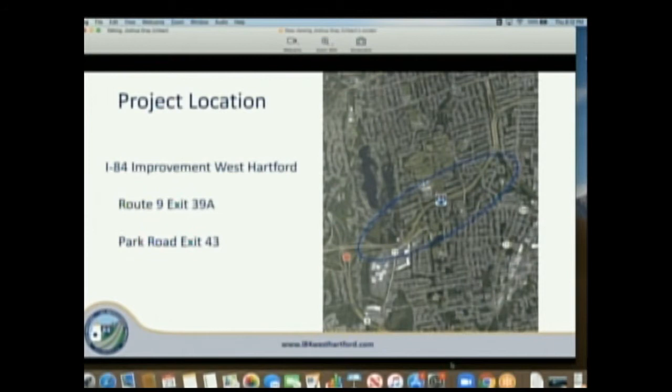So just a note on the location of the project. On this map, I've circled the approximate limits of the project. On the left side of this map there is the interchange with Route 9. This is the western limits of the project, at the Route 9 exit and on-ramp. Then the eastern terminus of the project is where Park Road has an on-ramp to I-84 Westbound. So that's the approximate limits of the project. It is 2 miles of Interstate 84 between exit 39A on the west and exit 43 on the east.

Down in the bottom here, you can see this is West Farms Mall. Across the street is Corbin's Corner, so everybody kind of knows this area well by referencing the mall. Also over here is Wolcott Park for the town of West Hartford, and Ridgewood Road with the interchange and the highways right here. Sort of in the middle of our project is also South Main Street. So that's just giving everybody an idea of the limits of the project.

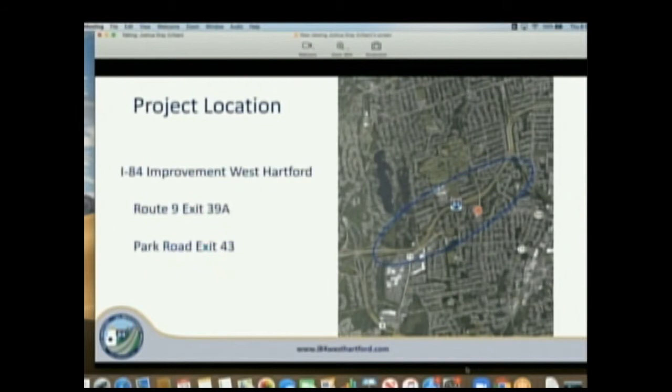Now I want to talk a little bit about the scope of the project and what work is going to be performed. The main purpose of this project is to improve traffic operations and safety throughout the I-84 corridor.

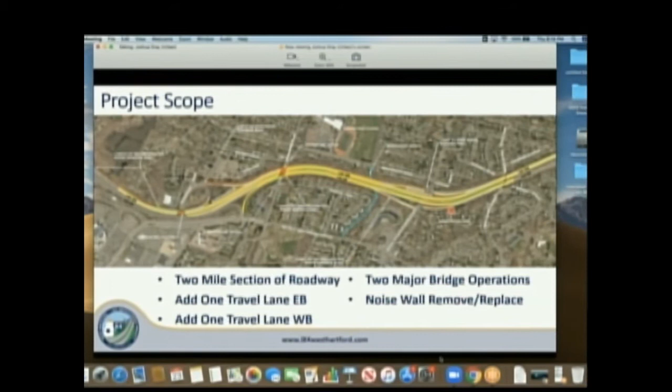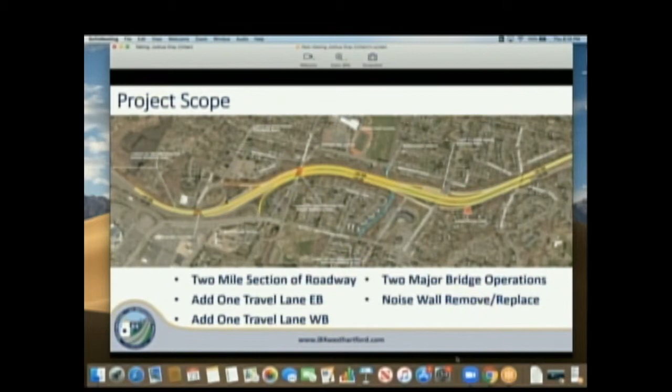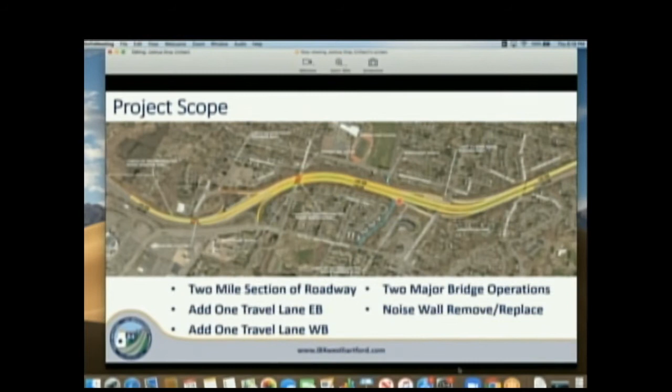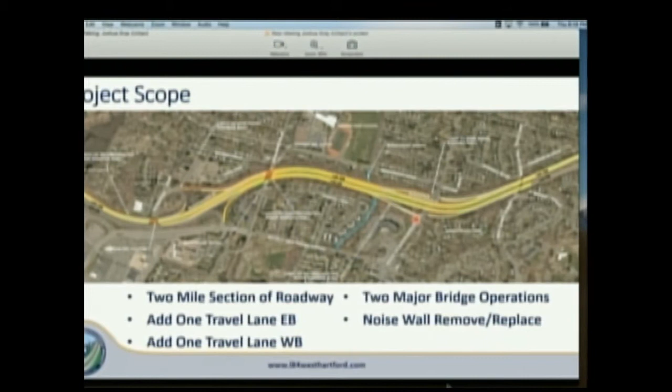We are adding an additional travel lane in the eastbound direction from the Park Road on-ramp all the way to the Route 9 interchange. We are also adding a travel lane in the westbound direction between the on-ramp off of New Britain Avenue and the exit at South Main Street. These additional lanes are what we call auxiliary lanes. They're for cars to be able to enter and exit the highway, so the lane would be an additional lane in between the on-ramps and exit ramps.

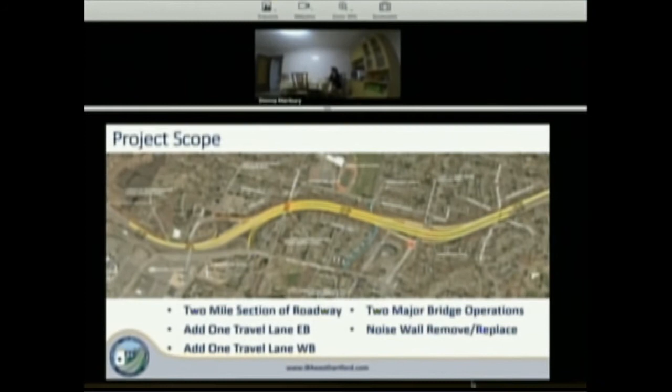One of the reasons why we have a lot of congestion on I-84 in this area is due to people entering and exiting the highway and having to shift over a lane when they enter, and people exiting often causes a conflict. So adding that additional lane will just ease some of the congestion from those merge and diverge moves.

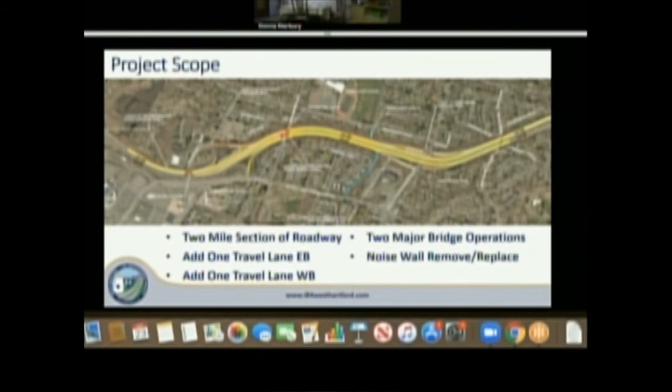There will be some major bridge operations for this project. One I want to highlight is here at Berkshire Road. There are 2 bridges there, one for the eastbound and one for the westbound direction. Those bridges will both be fully replaced during the project, and they will be done in stages, so there will always be 3 lanes of I-84 traveling in both directions. So we'll be building those bridges pieces at a time.

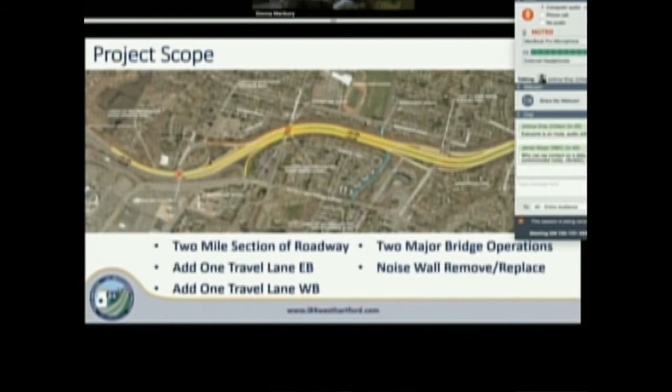The other major bridge is at Ridgewood Road, for I-84 Westbound, which travels over Ridgewood Road. That bridge is going to be replaced also. We are leaving the foundations for that bridge, but the entire bridge deck will be rebuilt new, and the bridge will be slightly widened to accommodate the additional lane on I-84 Westbound.

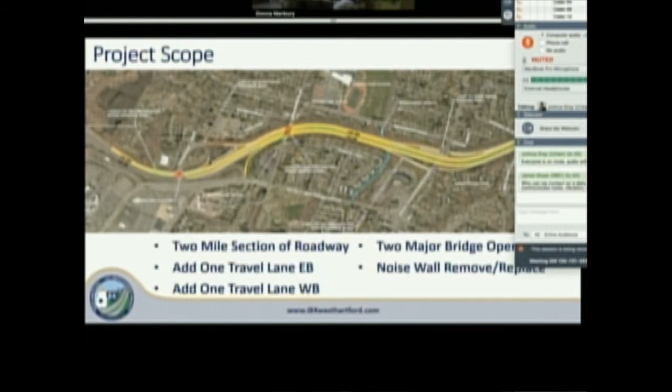There's also noise barrier walls in this project. There are noise barrier walls existing along the highway today. Many of them are fairly aged, so those will be removed as part of this project and replaced with brand new noise barrier walls.

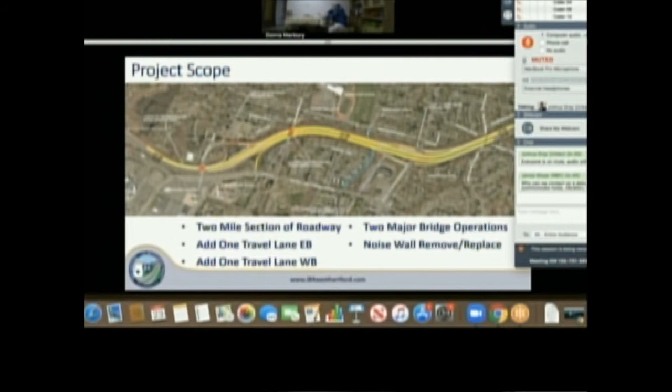Just some of the major operations for the project. I've already mentioned several. We will have a new pavement overlay in addition to the widened lane. We will overlay the entire project with new pavement.

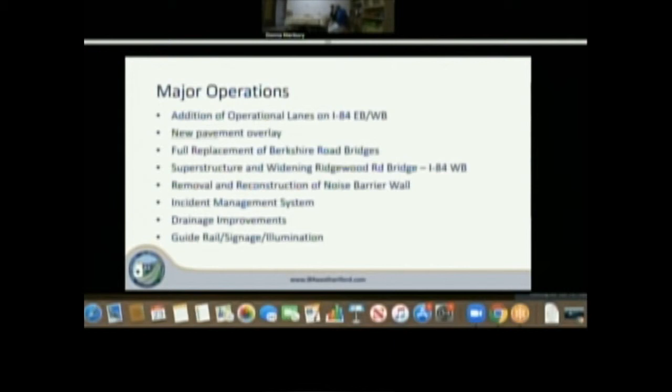There's some discussion about the replacement of the Berkshire Road bridges and the superstructure or bridge deck replacement for the Ridgewood Road Bridge. There's also work on the incident management system, which the Department of Transportation uses to communicate with the traveling public. You'll notice overhead signs with messaging on the highway - those signs are part of the incident management system to alert drivers of traffic ahead, accidents, or lane closures.

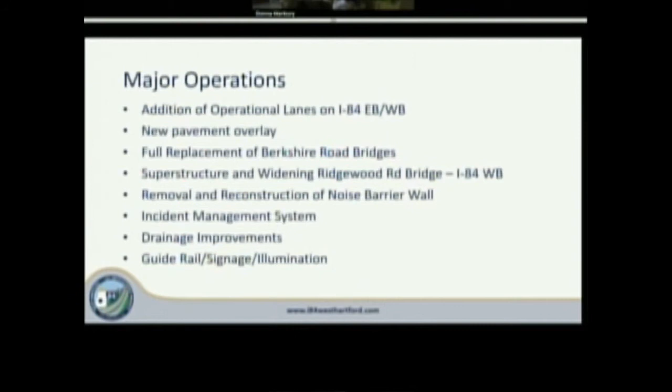So we will be replacing some of those structures. We will also be installing additional speed sensors and cameras within the project limits to help with that system. There's also drainage improvements involved with this project.

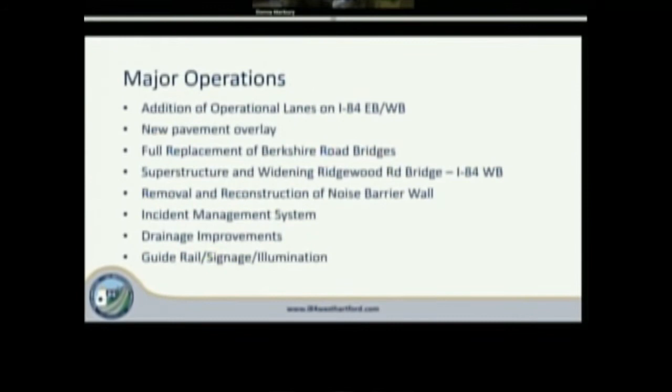Some drainage piping and structures are being replaced. There's some grass swales, and in general it's just upgrading the drainage in the area. There's a few additional drainage features to help out with some areas that had poor drainage in the past.

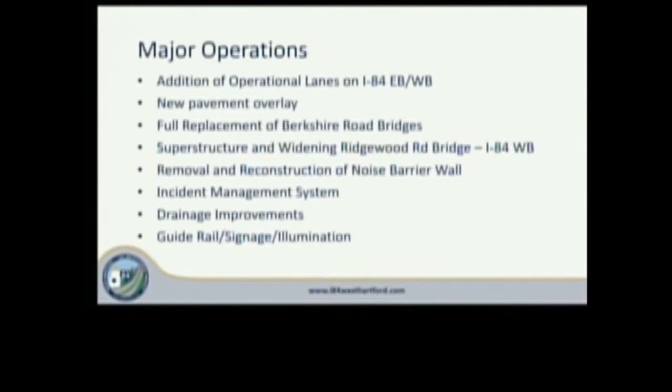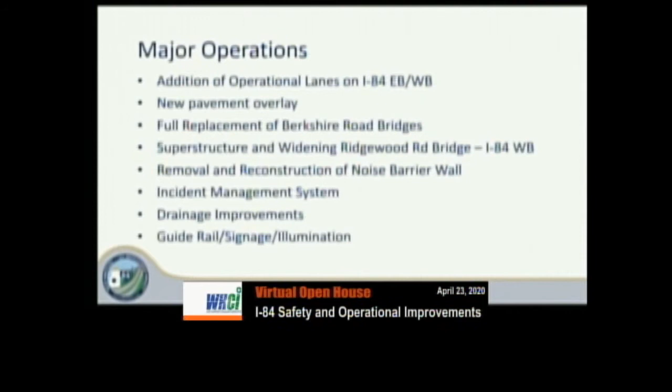And then there's multiple safety improvements, mostly to bring I-84 up to current standards. There's some additional guide rail along the sides of the highway and in the median. There's new signage and new illumination, lights along the highway ramps and things like that. This is all based on current DOT standards.

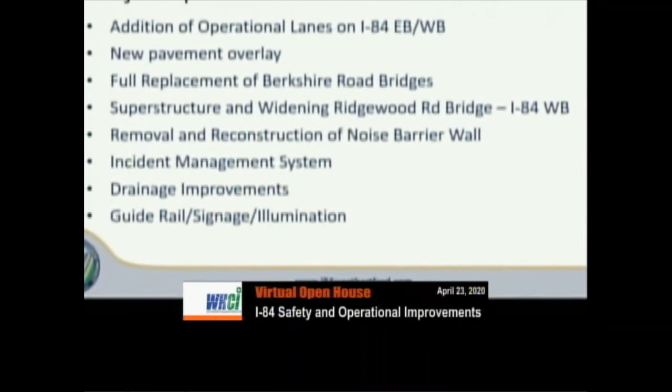There will also be some minor bridge repair work done on some of the bridges in this area. While we're out there, we will be repairing some of those bridges and bringing them into a state of good repair, and replacing some of the concrete parapets to conform to current design standards.

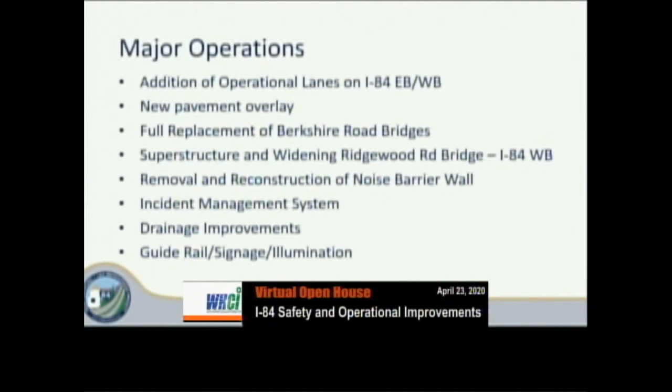Just a quick word on the stages of construction. As I mentioned before, there will be 3 through lanes in each direction of I-84 during the construction process any time there is heavy traffic. So on a daily basis, there will be 3 lanes open in each direction. There will be some nighttime closures that will reduce that number of lanes, but during heavy commute hours there will always be 3 lanes open.

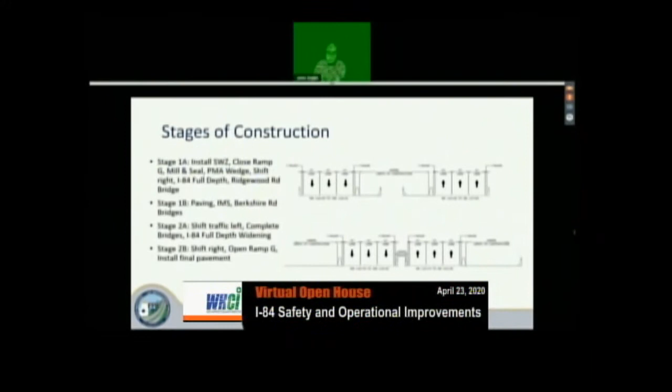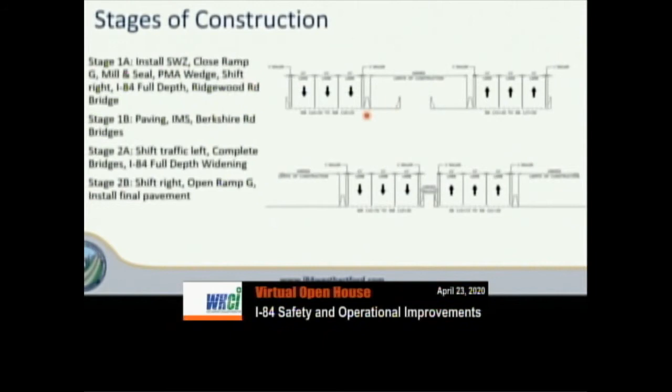We accomplish that by moving traffic inside or outside on the highway. You can see the top picture there with traffic all shifted to the outsides of the highway, and then the contractor will be allowed to work in this middle area. There are concrete barricades here that will separate the work area from the traveling public for safety. In other stages, we'll shift all the traffic to the inside or the median of the highway, and the contractor will be able to work in the outside areas. That's how we're able to replace these bridges while still maintaining 3 lanes at all times.

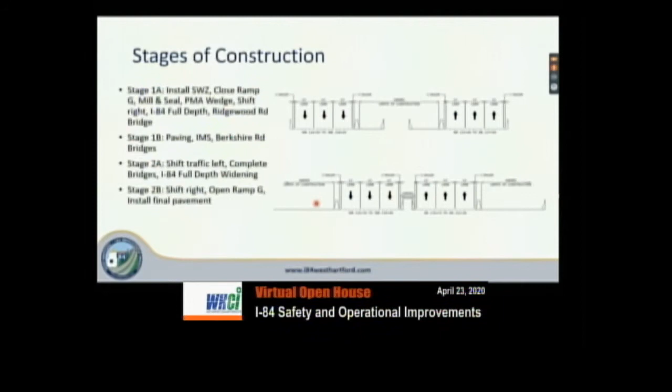During 2 of our stages, we will also have a ramp closure, and I'll talk about that more in a minute. And at the end of the project, there will be a final pavement installed so the whole project from end to end has a nice finished surface.

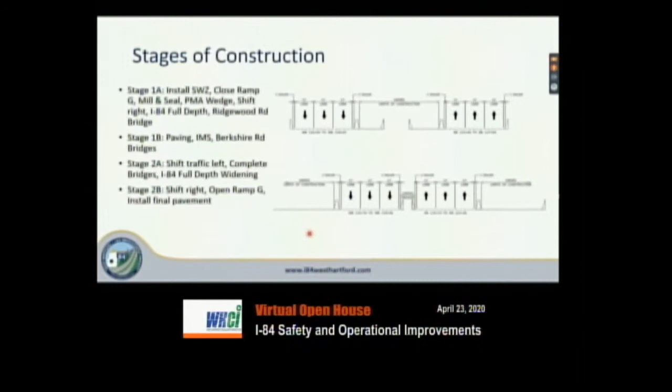The department did work with a lot of the businesses in the area, some of the residents, and the town of West Hartford about this closure. It was determined that the best time to perform that would not be for the entire year, but only during the summer construction seasons. So the closures will happen from May to October this year, and from April to October 2 years from now in 2022. That period allows us to reopen the highway ramp prior to the holiday season when this area of town is very busy - so by the end of October, this ramp will be reopened for November and December.

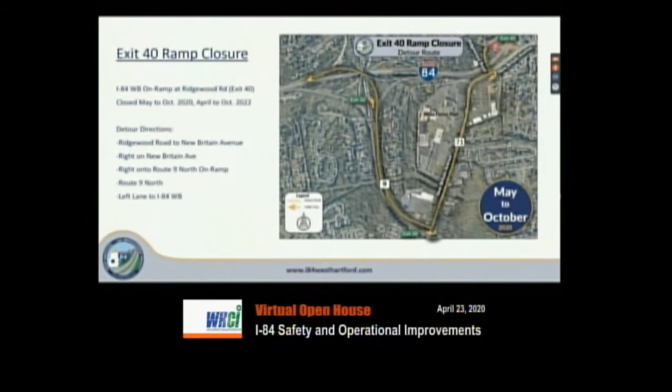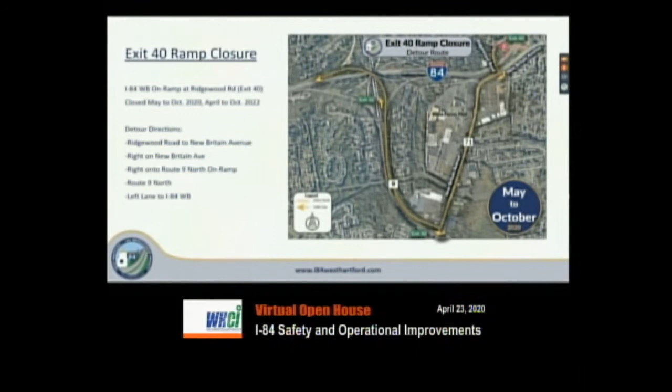Just the directions for the detour: go down Ridgewood Road to New Britain Avenue, take a right on New Britain Avenue, travel down Route 71 past West Farms Mall towards Route 9, take a right onto the Route 9 North on-ramp, travel up Route 9, get in the left lane, and get onto I-84 Westbound, which is a left exit off of Route 9. That's exit number 32.

During the detour, we will have detour signs up. There will be orange construction signs indicating the path that the motorist should take. There will also be electronic message boards to notify everybody in advance of the closure and to assist the traveling public with information. You will see those signs out there. The path is very well signed, and many of those are not displayed yet because we haven't implemented the detour, but that will be coming soon.

The projection right now for the detour is during the second week of May, and we will be providing more information when the exact date is known. We'll be providing a press release through the department's website, updating our project website, and emailing everybody registered on our website with an update.